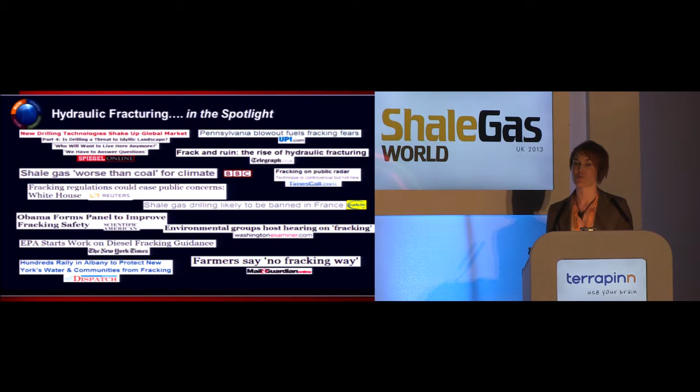It's a 20-minute presentation, so it'll be rather brief, but I'll be available to discuss with any of you after the session. I'll talk about some of the highlights on how we as an industry can try to help provide assurances, be open, inform what we're doing, so that people actually learn about the technology and understand why we're doing certain things.

One of the things in North America we may not necessarily have been very good at is communicating, making sure that we have the information available. Some of these aspects have been brought up already in the discussions this morning. We'll talk a little bit more about that, for example, disclosure and how it took a while before that happened in the United States.

But also how we can strive for environmental leadership continuously. So not just try to assess the concerns that are immediate, but also try to continuously develop better products, better technologies that are more environmentally responsible to help minimize the environmental footprint associated with this process.

So one of the things that we talked about a little bit earlier today is groundwater and groundwater contamination concerns. And I have several people here in the audience that are from Halliburton as well, Pinnacle, that have more experience on this specifically. But we have data available where we can look at where the groundwater supplies are. And so this has been done. This is just one specific example.

You can see the blue here on top is where your groundwaters are, and here on the y-axis you have the depth in feet, and the distances where you have those as compared to where we have our mapped frac treatments. So this particular one is in the Marcellus, which is in the northeast of America, but we have also done this in other regions in the United States, and you'll see similar trends that generally speaking you have a distance, a delta here between where the frac treatments are and the groundwater of up to several thousand feet.

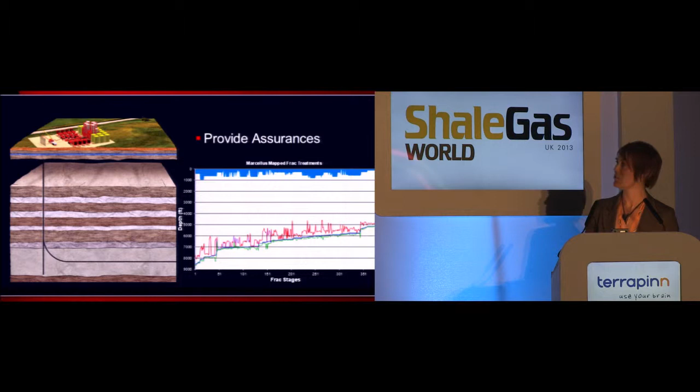But another thing about the whole thing: disclosure, chemicals. So we use chemicals during our hydraulic fracturing treatment. And when we use chemicals, most people in our industry are not chemists. I'm a PhD chemist. But most people don't necessarily have the background related to chemicals, what they're used for, what's in them, which ones are dangerous, which ones are not dangerous.

So one of the things that the industry eventually did was start providing information related to this. There's one website, several of you may have heard of, fracfocus.org, for example, where you can find some of this information. A lot of the companies have their own internal websites, and this is an example that I have here, where you can go to the world map, and this is a continuously expanding effort. We started this effort in North America, because that's where we did a lot of the shale gas and shale oil development, unconventional development. And you can look at the states.

So if you're in Pennsylvania, the specific example is in Pennsylvania, we have X number of fracturing fluid formulations there, and you can click specifically on the one you'd like to know more information about. And it will come up with a sheet here where it lists the additives that are part of that formulation.

It can also give you a pie chart of how much of each one of those there is as a relative percentage to everything else that's in that fluid with that specific component. And it also lists the specific constituents that are part of that fracturing fluid.

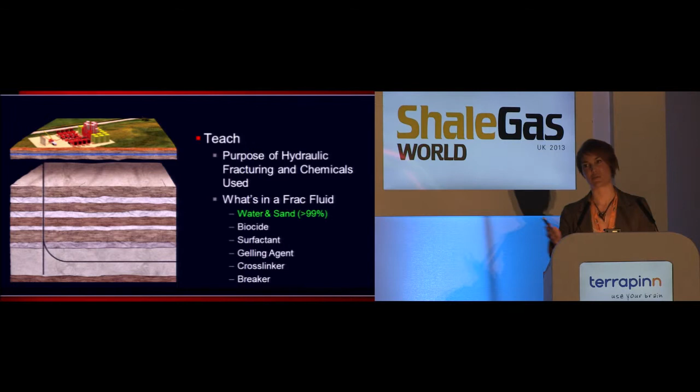Striving for environmental leadership. There are several ways we can do this, and I'll share a few examples of some of the things that have been done in North America and how we help apply these.

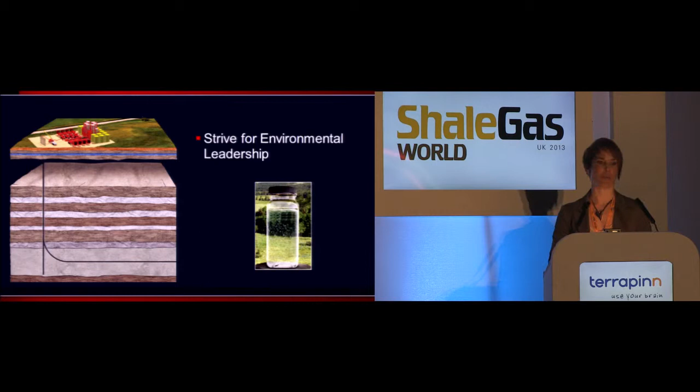The first one I have there on the left is recycle. So a couple slides ago we talked about how the majority of this is water. And yes, we do use large quantities of water. You can discuss relative to other industries whether or not they're really large, but the reality is we use large amounts of water.

So as we're using this water for the hydraulic fracturing treatment, you also generate a byproduct. That byproduct is flowback and produced water. So it's also water. When you're generating that byproduct, it would be silly not to consider trying to recycle it. So that's one of the efforts.

This discussion started probably about 6, 7, 8 years ago in North America. And there are different reasons for that. There are different drivers. It could be drought climates, for example, lack of fresh water, or it could be difficulty disposing of these waste products. That could be another driver. But recycling is something that's now much more commonly done in North America. That wasn't really done much many years ago.

If we can remove certain things from the fracturing treatment, that's another way that we can try to improve. This specific example, and I'll show a little detail later in the slides, is where we removed a certain chemical component and we've replaced it with another method of implementation. So there's certain things we can do to be better like that.

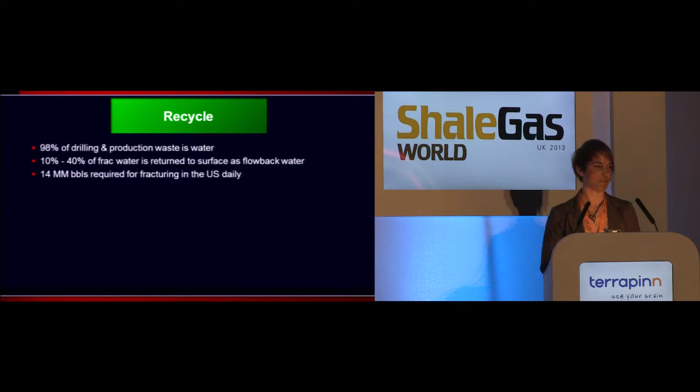And the debates are still ongoing, which treatment is better, which one actually applies to a majority of these waters. Because the issue becomes, when you have variability of source waters, such as these wastewaters, that vary from 20,000 milligrams per liter up to over 300,000 milligrams per liter in salt content. And not just that, individual salts within that mixture from one water to the other varies as well.

And if you're in the same area, let's say we talked about Marcellus Shale earlier, let's say you're collecting water only from that area, they're not going to be consistently the same. If you collect it 1 week to the next week to the next week, they're all going to look different. So if you want to have a robust treatment method, that becomes pretty challenging.

And one of the biggest challenges is when you do this treatment, you're going to generate some sort of waste. And one of the things that North America has been rather lucky regarding has been that the actual flowback and produced water has been classified as non-hazardous waste. It's oil and gas exempt. Now that may change. There's a lot of discussions ongoing with that. And certainly in continental Europe, I don't think you'd be in the same situation.

But with that said, you wouldn't have had to completely undergo a chemical analysis of the water before you disposed of it. It's a waste, but it was relatively easy to dispose of this waste. Now, if you chemically treat this water or mechanically treat this water somehow and you generate a waste, well, that waste now has to be analyzed and disposed of properly.

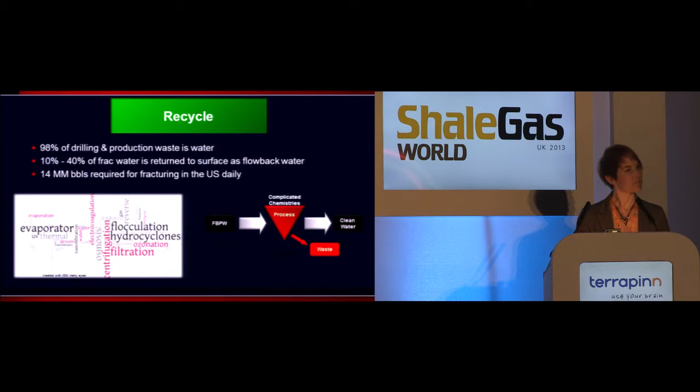So there's still debate ongoing related to treatment, and there's still a lot of treatment companies, but most people have moved towards doing a minimal type of treatment, which means you're not removing all the salts present in this water. I'll give you two examples. If you have a water that's close to saturation, let's say you have a 250,000 TDS, total dissolved solids, produced water. If you put that through a distillation unit, you may end up with, just making up numbers here, 20% of desired product, and the rest will be a byproduct. That doesn't seem very efficient.

If you take another water, however, that's much lower in salt content to begin with, and do the same thing, you may end up with a reverse scenario, where you have 20% byproduct and 80% product. So that doesn't sound so bad. But if you're on a location where the water source isn't going to be consistent, then you have to consider that if you want to come up with a viable option that makes financial sense.

And another thing related to this as well, where are you going to use that water afterwards? So if you're going to reuse it in hydraulic fracturing, the question quickly became, do you need potable water or fresh water in hydraulic fracturing fluids? Traditionally speaking, the answer to that question was yes. Nobody ever thought that it could be done with salt waters.

Then some development started years ago in certain areas, Gulf of Mexico, for example. Now this is becoming a big problem in Saudi Arabia. There's lack of water. What type of water do they have available? Seawater. So that's something that people are starting to use in fracturing fluids. So seawater, relative to flowback and produced water, in salt content is relatively low. Depends on which sea you're in. Gulf of Mexico, about 30-something thousand milligrams per liter. The Arabic Gulf, those are a little bit higher.

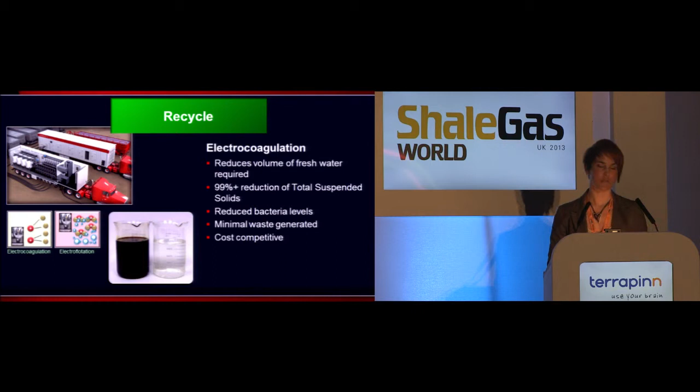Maybe instead of taking these flowback and produced waters, running them through distillation units and using potable water again, at the same time as we're generating large amounts of waste that we still don't really like that we're doing, maybe we can just try to reuse them with minimal treatment as easily as possible. So one of those things is electrocoagulation that's used commonly today in North America. This essentially removes the suspended solids and some of the salts, but you're still left with a brine water.

Now, if you do that, you have to come up with better chemistries. So in response to this, and the fact that the industry realized that it's just not feasible to generate potable water out of all this flowback and produced water that we're generating, but maybe we can just try to reuse it with either no treatment or minimal treatment, we definitely have to develop better chemicals.

So traditionally speaking, if you run a water frac formulation, you use a friction reducer. You're relying on very high rates to pump that proppant out into the fracture. And as you're relying on those high rates, 100, 120 barrels per minute, these are very high rates, you're increasing surface friction as you're piping this water down through the pipe, which means increased surface horsepower and so forth. The friction reducer is essentially your most important component.

But when you take that friction reducer, these are high molecular weight polyacrylamides typically, if you take those friction reducers and put them in the salt waters and try to use them, they don't function anymore. So you can pump them, you can increase the levels, and you can hope for the best. But if you're on location running very salty water and your friction reducer isn't performing, your surface treating pressures are going to go up, and you're going to be left with no choice but to slow down the pumping rate.

And if you slow down the pumping rate, and what you depended on to get the proppant into the cracks was the high pumping rate, then you have an issue and people start being concerned with less production. So that's one of the things chemists had to come up with, was better friction reducers. And this one here is just an example.

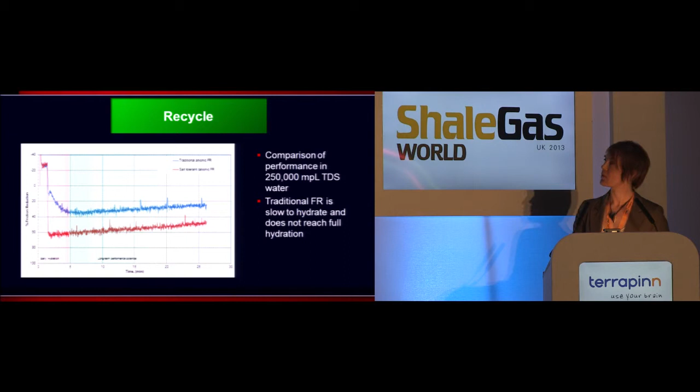Another example, if we can switch slides, another example is in cross-linked fluids. So now we have a little bit more complex chemistries. So friction reducer chemistries, even though they weren't successful to be used in salt waters previously, were a little bit more straightforward to develop a solution to.

However, when you look at cross-linked fluids, now we're talking about having a viscosifying agent, thank you, having a cross-linker, and then having a breaker to make sure that the gel that you're producing, you can break it down before you flow the fluid back. To make sure that all of those work in these waters that have a variety of contaminants in them is close to impossible if you use standard recipes.

Standard recipes are designed so that these individual components that you add to the fluid will work with each other, which is challenging enough. You want to make sure that the breaker doesn't break until it's supposed to break, but you want to make sure the crosslinker crosslinks when it's supposed to crosslink. Now, with all these ions in there, they're either going to potentially delay it, completely shut down that process, or speed it up. So you're not going to have the physical properties of that fracturing fluid that you want. So that's another thing that our scientists have to start working on.

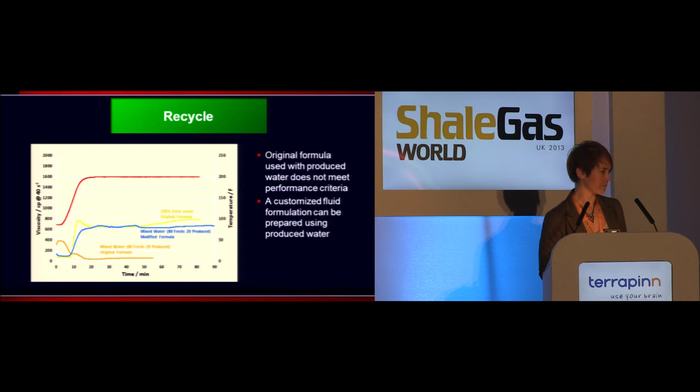However, what scientists figured out after many, many months of trying is that it is possible to indeed match that viscosity profile curve, even with this water, using the same components, but you have to come up with a customized formulation. So the amounts may be completely different, but it's possible to do in 100% untreated water. So these are pure wastewaters that you can actually do this with.

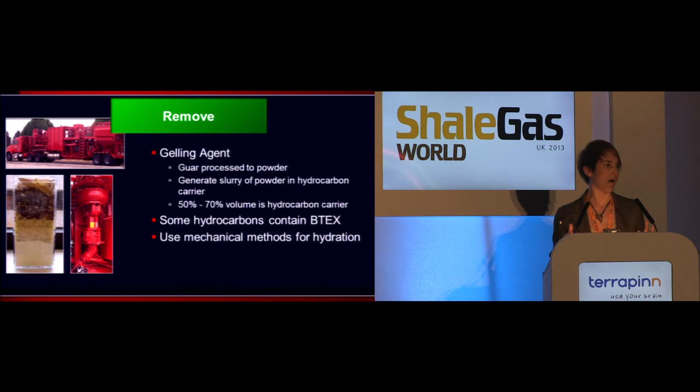Another thing, removing gelling agents. Guar is typically what we use as our viscosifying agent in our cross-linked fluids. And typically, it's been generated in a slurry in a hydrocarbon carrier. Well, a hydrocarbon carrier, that leads to BTEX. That does not sound good. What can we do about that? So one of the things is we ended up using a mechanical means for hydration to make sure that we still have the efficient properties that we needed while removing this hydrocarbon carrier. So there are things we can do and try to combine mechanical means as well as chemical means to remove one where it makes sense.

Another thing, ultraviolet light we've used to replace biocides. Care has to be taken when you do this. Certain things don't apply everywhere. These methods aren't effective in all cases. You have to do some pre-job testing, QA/QC testing, to make sure that the water is transparent enough at 254 nanometers to actually penetrate and be able to kill bugs. But that's one other way where we can actually replace a chemical completely by using UV light.

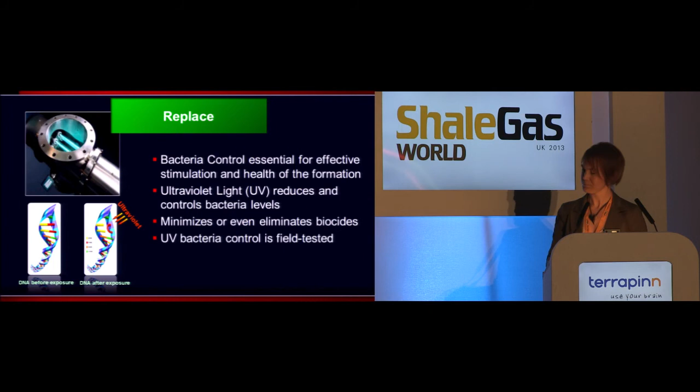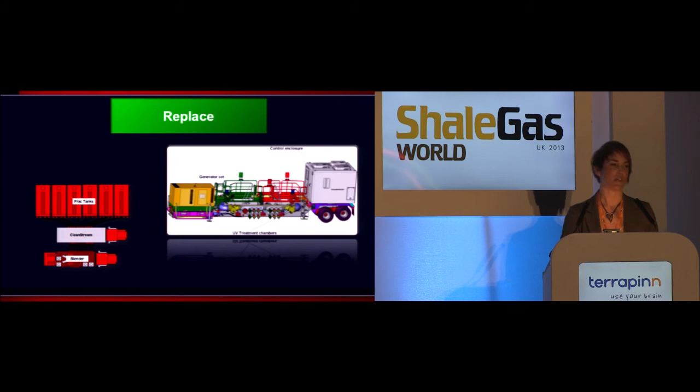And what we do here is we have the frac tanks where we keep the water, and our units with UV light in between the frac tanks and the blender, and essentially we treat it on the fly as we go downhole. And then finally, fracturing fluid systems, developing new fracturing fluid systems. One team in the research and development area was challenged with coming up with a new fluid system that was much safer.

They looked at different lists. Where do we pick these components from? How do we know what's considered safe by the general public? Well, if you eat it, most people consider it safe. So they looked at the Code of Federal Regulations, CFR 21, which is a list of whatever's allowed to be in food additives. The rule was it has to be good performing, it can't be any worse than current fracturing fluids, and you can only pick components from that list. So a team went at it and developed a new fracturing fluid system.

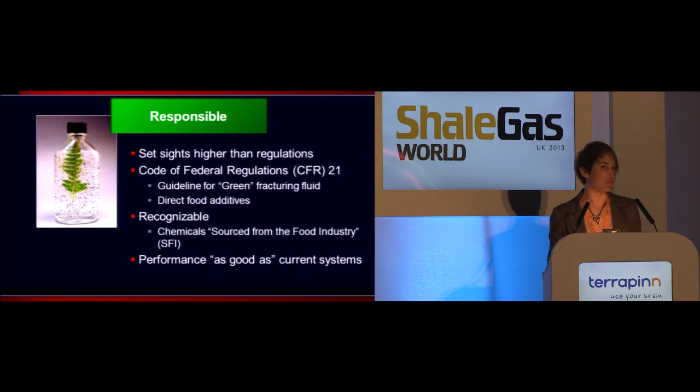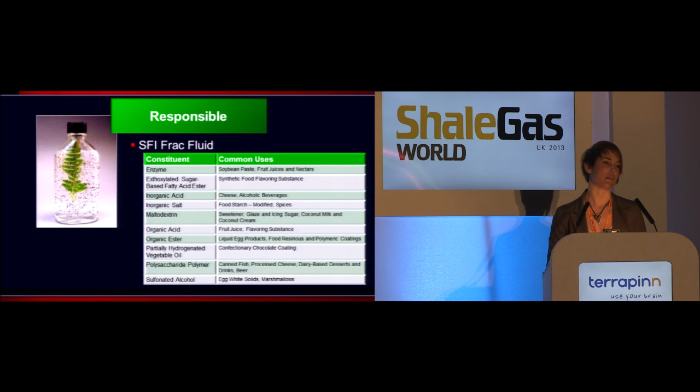Now, this fracturing fluid also lists the different constituents we have, and of course here, on this particular list, you'll see common uses in all food products, because these are things that are in things you eat. But it can be done. It's just that nobody had thought about doing it before, because we hadn't been challenged to do it. So now, this is part of our product development where we continuously evaluate products to make sure that we do it in a responsible way. And of course, the properties still have to be equivalent or better than previously.